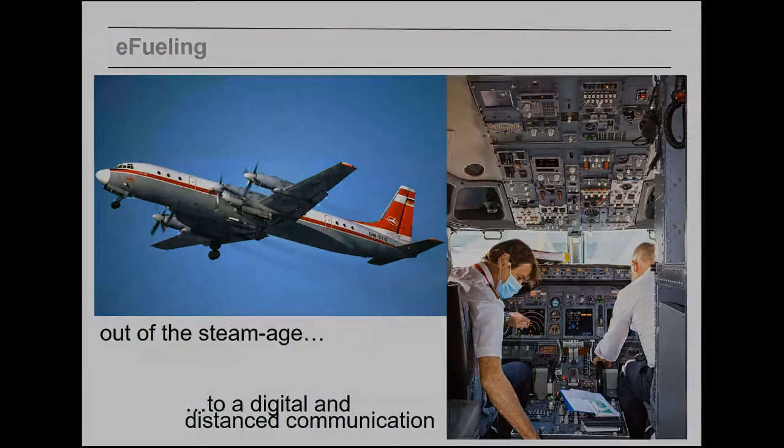The basic purpose, or basic feature, of e-fueling is touchless information flow between the flight deck and the into-plane agents, no matter whether the aircraft is in the air or on the ground. Especially in times of COVID-19, it also allows a distanced process. What is crucial to an airline is timely, delay-free operations. Whenever a delay happens for the first time, it affects all subsequent flights.

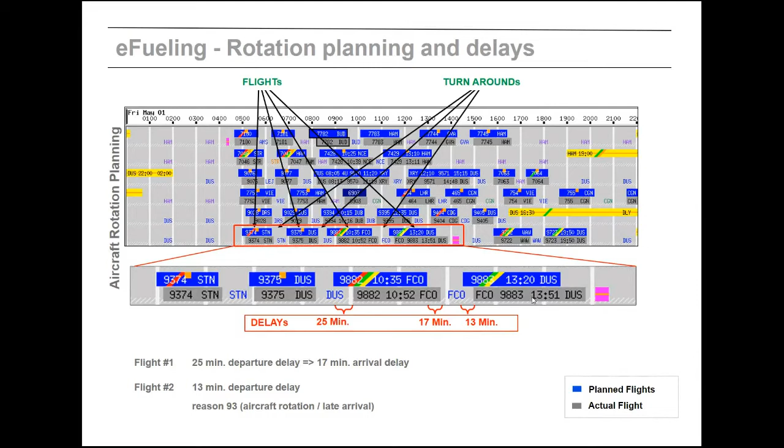That is what makes the operation of an aircraft unstable, and that is what is to be avoided. The information exchange between an aircraft and the into-plane agent, or the fuel truck in particular, is done via electronic data exchange. I would like to give a little animation of the process.

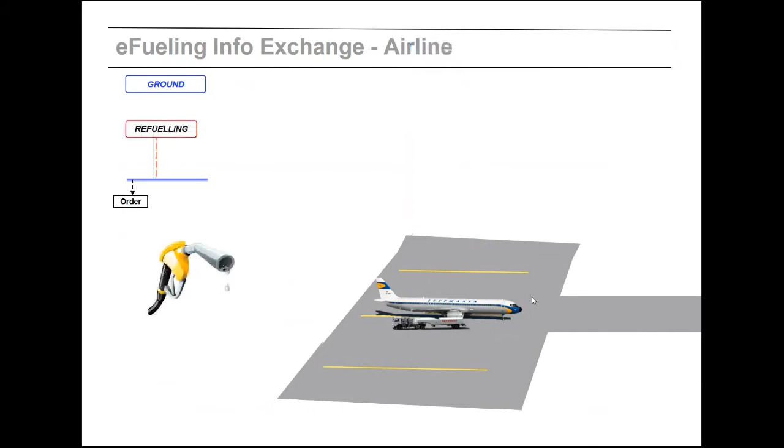The pilot sends, possibly via ACARS or any other electronic means, the fuel order. This fuel order is then transferred directly to the fuel truck, which is alongside the aircraft and serves it with refueling. The refueling happens, and afterward the fuel truck sends the ETIC, or fuel summary, the electronic delivery slip. The aircraft gives an acknowledgement back to the fuel truck instantly.

That is what saves time in the process, especially for the into-planer. There's no need anymore for any paper print, or for running around to find a person to give a signature, and so on. This is a totally independent process, and the acknowledgement comes right away from the aircraft, taking no longer than 2 minutes.

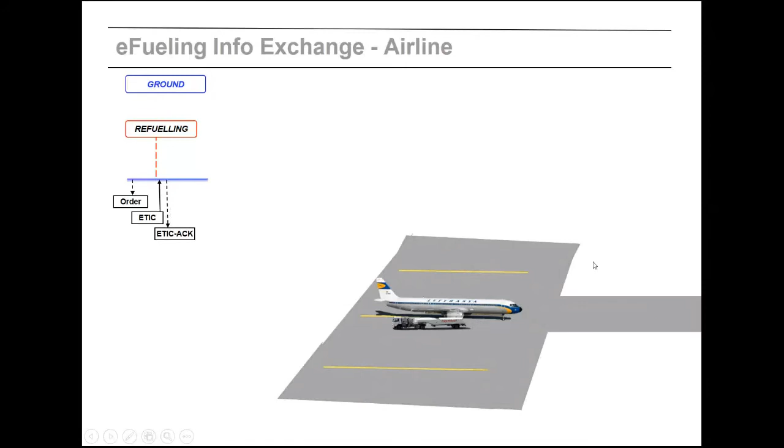After the acknowledgement is sent to the fuel truck, the process for the into-planer is over. It is totally independent from the quantity check of the pilot. The pilot's quantity check can be done later on, according to the data which is uplinked to the aircraft. You see that over here, shown in blue.

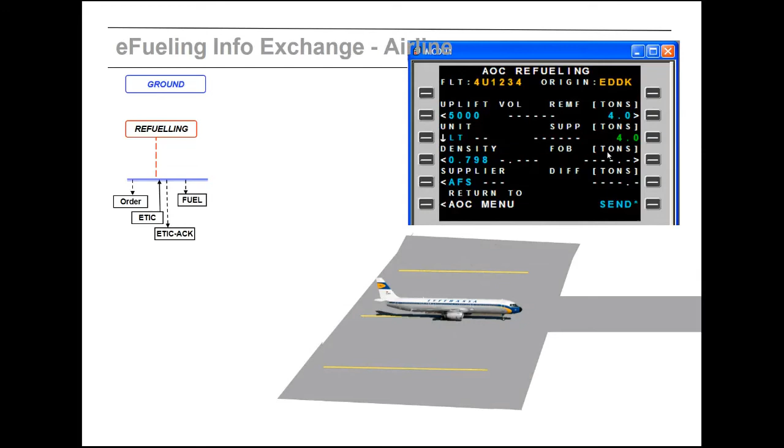This is an example using ACARS, but it can be any other electronic means, ELB, pilot app, or whatever. The process is independent from the means of communication. After the pilot does his quantity check, he sends back a message to back-office processes like accounting, emission trade, or whatever. That is totally independent from the into-planer.

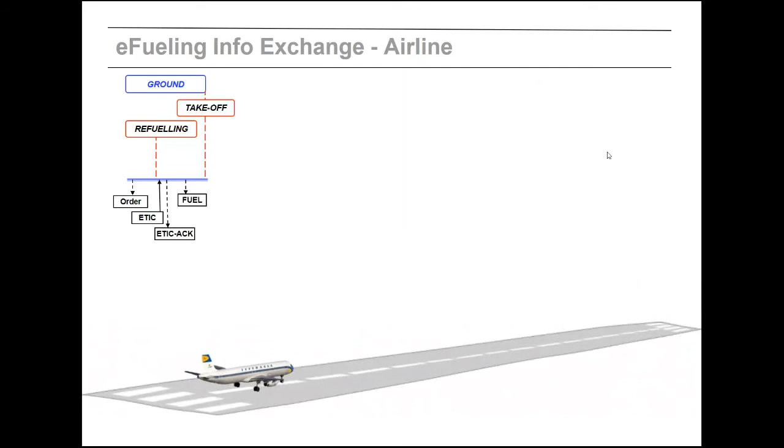Then the aircraft does what an aircraft should do, and what it makes money with: it flies. So that is totally uninteresting for the ground process, for the into-planer process, until the aircraft approaches the next airport.

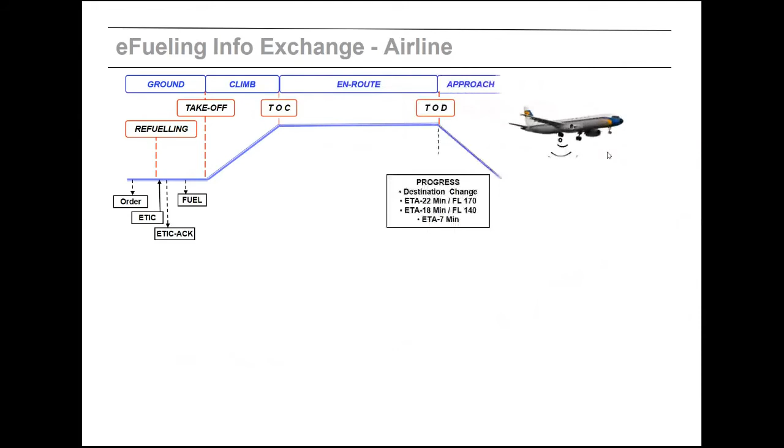Even during the flight or during the approach, the aircraft can link down some messages and give information to the into-planer at the next airport. The last message an aircraft usually sends is any kind of flight log, for example the shutdown message or the shutdown quantities. That is the process from an airline point of view.

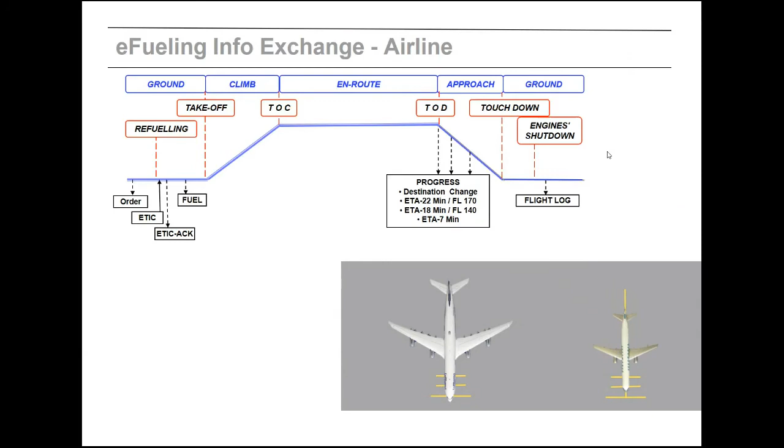If we look at the other side of the process, the refueling company, they have a different process, but it's dependent on the aircraft rotation. Even during the en route flight, the aircraft can link down some information like the fuel order; that can also be done during the approach flight, or during the ground process already. This is the dispatch period of the refueling mission for the into-planer.

Then the into-plane company does the physical refueling, and this process ends with the eTic or fuel summary, and in return with the corresponding acknowledgement.

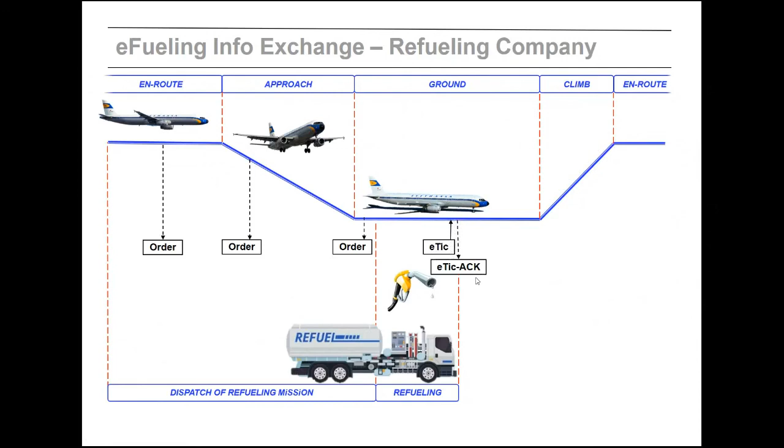This process can even be shortened. In case the aircraft carries the fuel for the return flight, the information can be given already during the en route flight of the aircraft. That shortens the dispatch process of the into-planer. This information is very valuable for him, because he can take one fuel truck out of his rotation planning, which gives some flexibility to the into-planer.